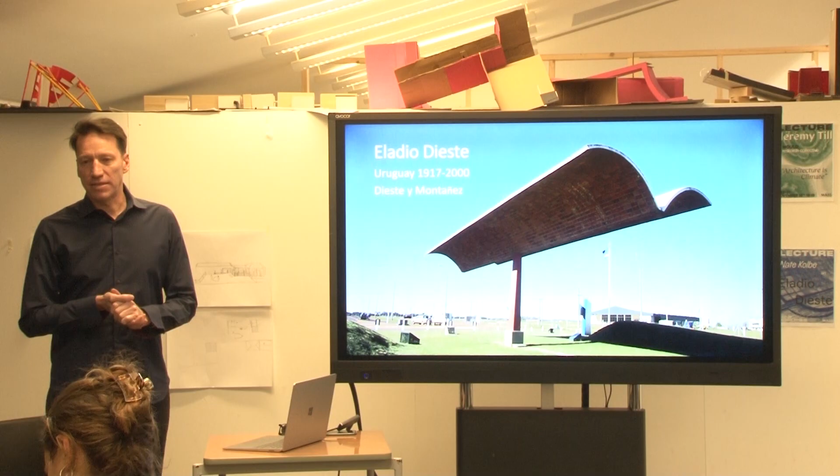So, as Matt said, Eladio Dieste practiced as an architect engineer in Uruguay and lived from 1917 to 2000. Most of his body of work is kind of from the 60s through the 90s. And the first question that I get asked is, why am I going to introduce Eladio Dieste to people? And that's why I start with this slide. This, to me, kind of sums up all the reasons that I love his work.

It's simple, quite minimal structures that serve a really industrial purpose. They just had a kind of pure function. In this case, this is called the seagull, and I'll explain more about it later. But it's just an elegant thing. It sits on a single column, spans something like 56 feet by 14 feet, anyway, I'm not going to try to convert it right now. But with a single, simple, reinforced concrete and brick shell. And I'll explain all about the techniques behind it later on.

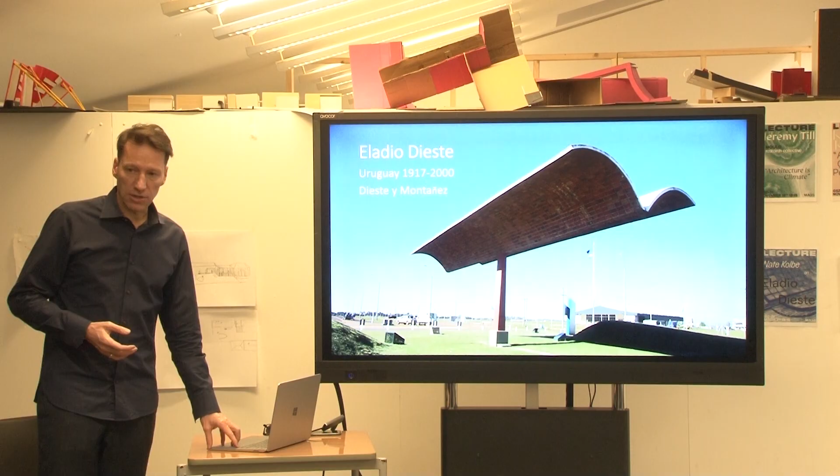So the reason I love this work is because there's a kind of elegance to its lightness. The way it touches the ground and the way it kind of talks about all you really need for a great piece of architecture is a brick roof. There are four principal areas of interest in Dieste's work. I'm going to start at the bottom here. So the one that I'm not going to talk about tonight is the folded surface, but this resonates in a number of his projects, which is quite stunning.

The ruled surface is one that is quite intriguing because it takes a very simple tool, the mechanism of the brick, and uses it to create complex three-dimensional surfaces. The cantilever barrel vault, we'll look at this quite a lot, and this is all about the cantilever because, just like the previous image, it uses this to extend the space of that roof quite a distance. Consecutive because they're linked together. And then we've got the Gaussian vault, which is another complex system, and it covers an extraordinary range of structural problems with a really beautiful integration of, let's call it, curvature and direction.

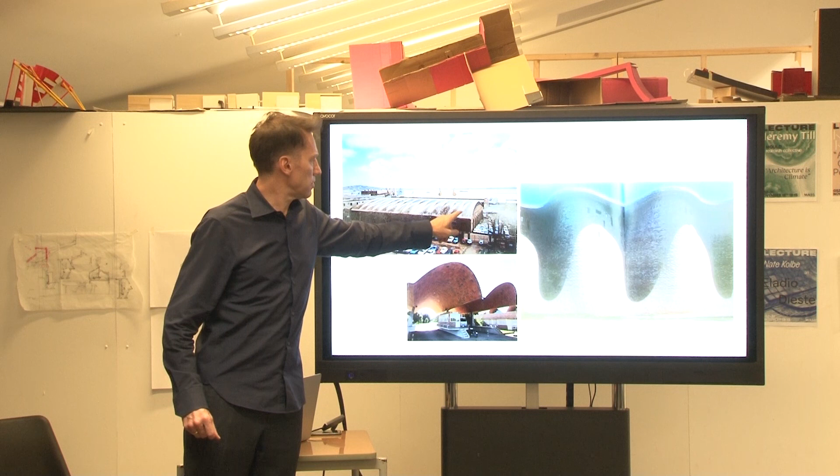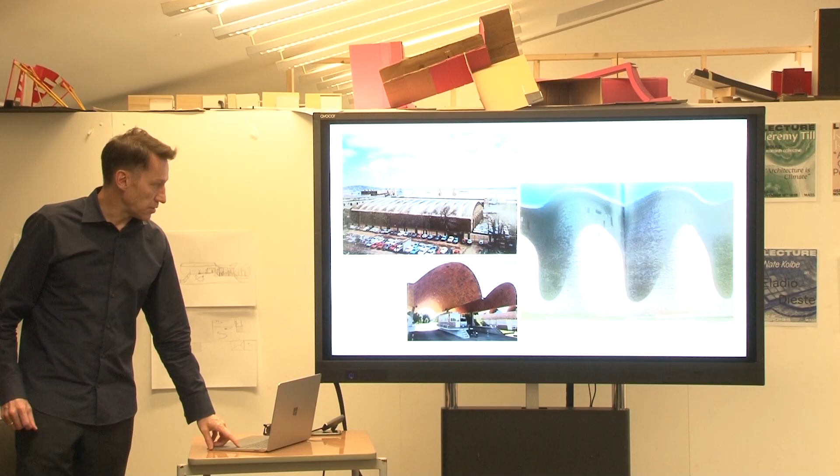So these are three different examples of this. So we see the port of Montevideo warehouse. So this is the Gaussian vault. This is one of the consecutive barrel roofs, and this is the ruled surface of the Church of Christ the Worker. So as you can see, in this case, this is a ribbed barrel vault. Dieste is using the idea of the undulation of a sine curve in order to produce an enormous vault. And this is just made of brick, so this is only brickwork doing all of this joy of space.

And he's working in brick because that is something that is essential to the quality of working in Uruguay. So that's what they had. That's what they were good at. He's utilizing what's there as the real resource. And within it, you take a utilitarian space and you get something extraordinary out of it. You don't have to work so hard to talk about the architecture because it comes through as material manipulation.

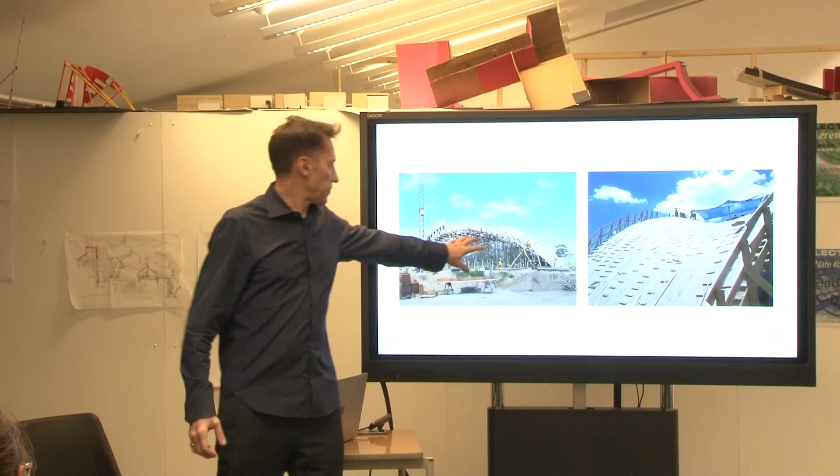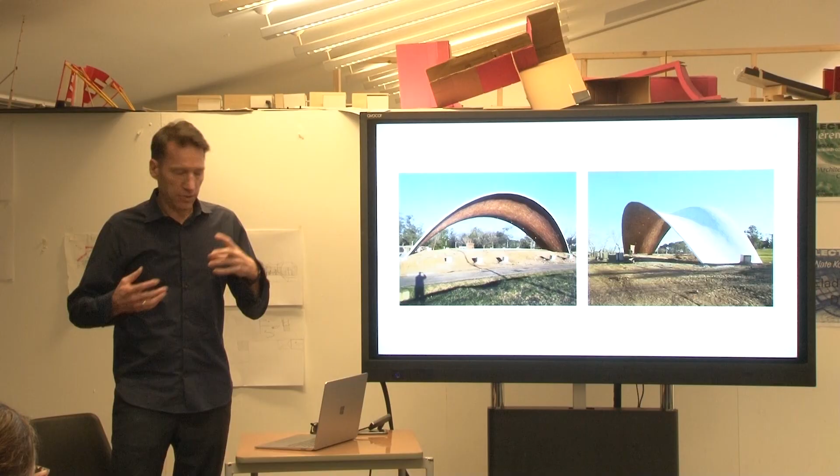In order to build it up, it's a series of really quite simple layers. And this is all using very straightforward labor techniques. Rough scaffolding, leading up to a surface that is laid over with simple timber slabs. And then you start to lay on the brick pattern, and then it gets reinforced and laid with another layer of concrete. And what you get out of it are these complex shells which start performing, whether it's a bandstand or protective structures. It produces a space of architecture that is astounding, lightweight, and quite surprising.

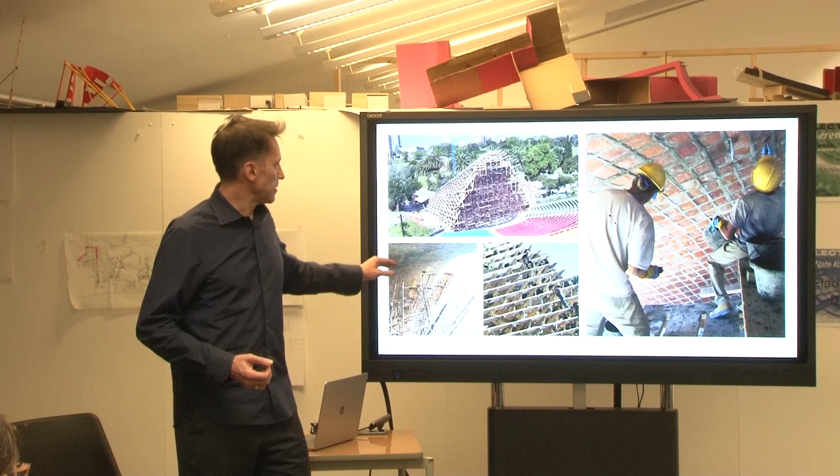And so what we're looking at again is the scaffolding that's going up inside it, the scaffolding work that's going to be used for the laying of the brickwork, the actual inside shell, and then going back in and patching into it from below to produce these wonderful forms.

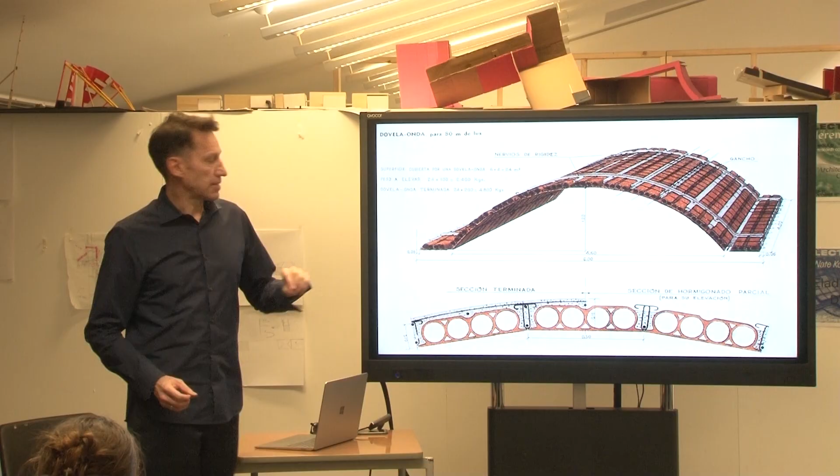So you can see the section is 150 millimeters. It's a brick with the reinforcing cable going through, being looped back up, and this is the upper tie. This right here is the upper tie, which is pulling that whole system back into tension. I think this is incredible. With very minimal amount of material, you can produce an extraordinary effect.

And as I said, these are really industrial. These are municipal bus terminals. These are for train stations. This is producing space for the working of the city to extraordinary delight. I think that's the nicest part about it.

It's not just I'm going to provide a big roof. It's not just I'm going to make a utilitarian structure, and because I want it to be overhung, I'm going to produce this enormous structure that will cantilever this huge truss. He truly believed in understanding the essence of the material in order to produce something without force, without trying to power their way through the mechanism.

And one of the things that I want to talk about next is actually this element here, which is just the end column and this flange, because all along, all of these barrel vaults are actually acting against each other. So as they press down, they're balancing each other because the next one is in sequence. But when you get to the end, all that force wants to then push out.

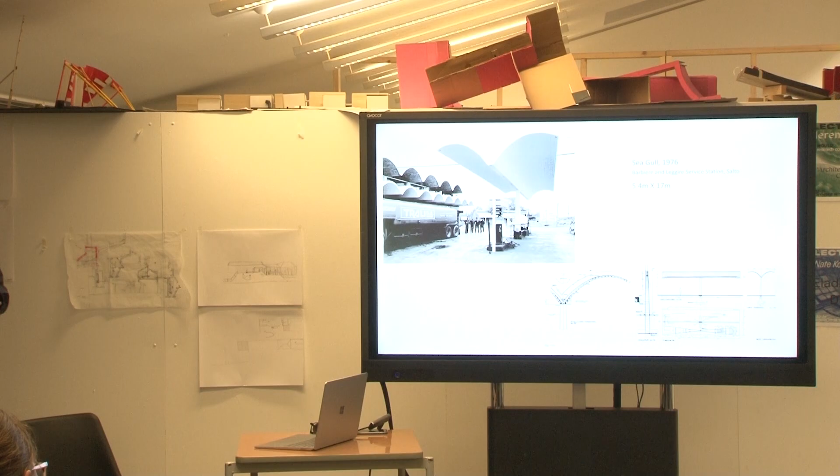It's really about L over 20, right? So you say 17 meters divided by 20, so you've got an 850 millimeter deep beam to do this. So that would be the typical beam that you would need in order to do this same thing.

It's producing a type of extra structure through curvature. So the idea that you can just produce thickness through form is the essence of being able to post-stress all these constructions. Now, this was built for a petrol station.

And I love it, it's a utilitarian structure. And the city loved it so much that they moved it, and now it marks the entrance to the city. So it's part of the city. It's not something that then gets thrown away just because it's no longer in use as a petrol station. It's something that actually is a marker for the city.

And again, really utilitarian, basic structures, simple things that help the life of the city. Toll stations and bus stops. And keeping in mind the environment, these simple roofs protect the building. They extend a long way out and offer a lot of shade and protection for these warehouses.

But then you get into the examples where he starts to combine the effort of the ruled surface, which is, all he's doing is he's got a straight line down the bottom, and he's got a sinusoidal curve at the top, and starts to link those two. It's a very simple move, but in doing that, it says that you don't have to have a super thick wall. He's using the geometry of those curves in order to structurally thicken that wall.

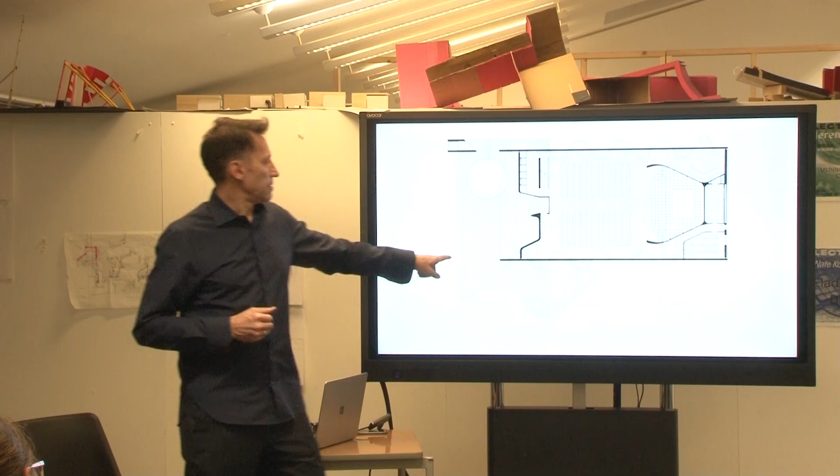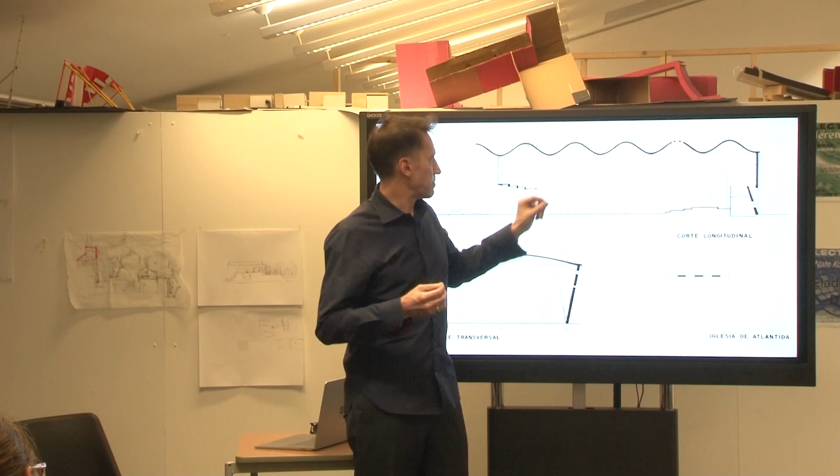So we had just talked about the section earlier. Normally you see a section drawn that thin, it's kind of like missing a certain amount of material. My argument is that actually the structural thickness, the structural depth of this roof is actually this much, but the material depth is minimal, and that's what's really so elegant to me about much of this roof.

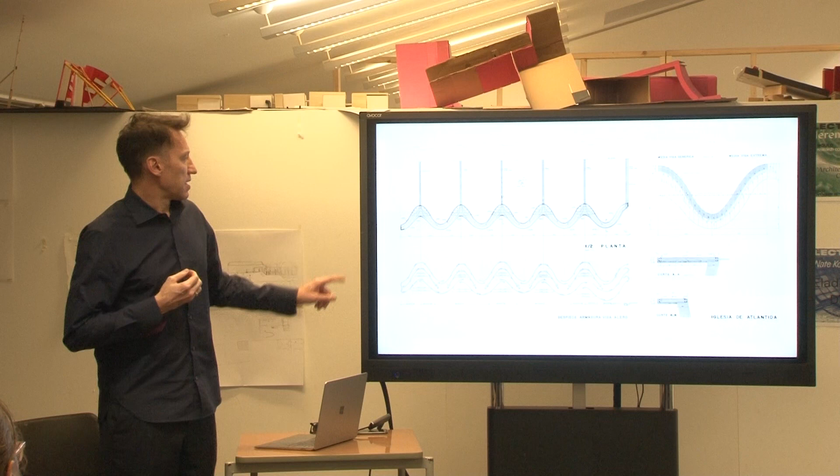And it also allows them room to kind of set things free. So in this case, it's creating a wall which is a series of kind of slats of brick. And so this is really quite an extraordinary church. I think it's one that's very difficult to comprehend just how much remarkable engineering went into it, because it's such a simple and modest structure.

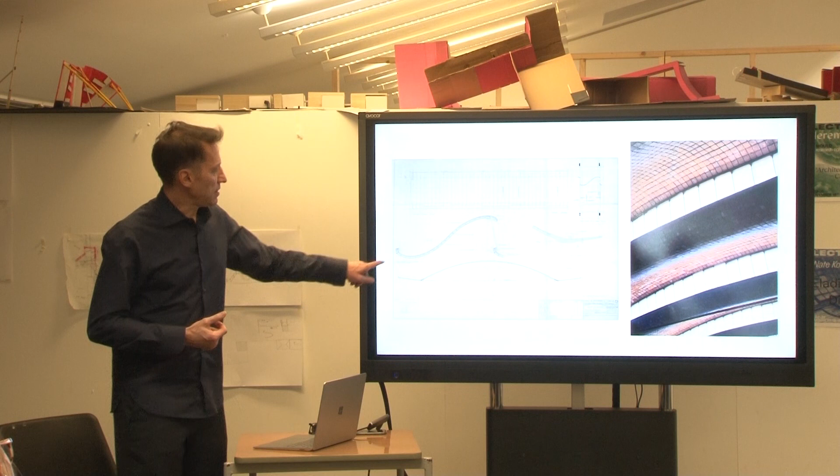You can see these are massive buildings. This is kind of wonderful how big a set of buildings you can produce with this very effective, very efficient mechanism of construction. So here you see the section of this Gaussian vault. So the simple S curve, you can see it's convex and concave. And so there's a midpoint here where it's actually the inflection going from one curvature to the other. And that's its cross-section in order to produce that kind of extra structural depth.

I find that this work is quite inspirational because it produces a huge amount of space with a kind of minimal amount of material effort. And he's going about making kind of architectural engineering through the excitement of saying, oh, now I can let light in, I can set space free, I can do things with a minimal amount of effort and maximum effect. So that's Eladio Dieste.